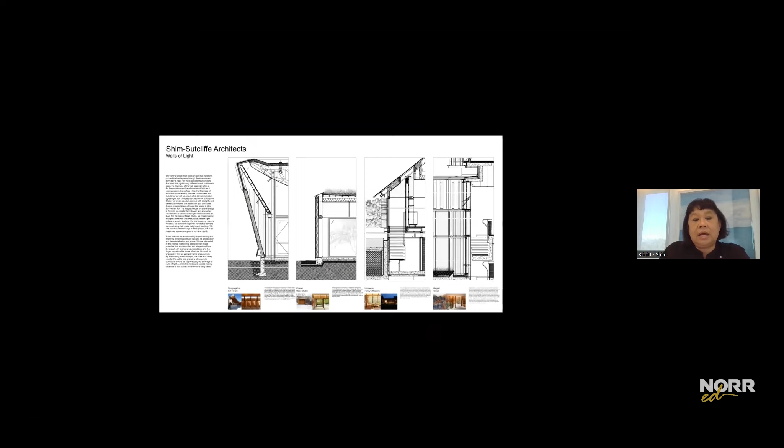This was the installation in the Biennale, but we actually thought about walls of light and the way that we create these thick walls that amplify and monitor and alter the reading of light. So we drew these very large sections as part of this exhibition.

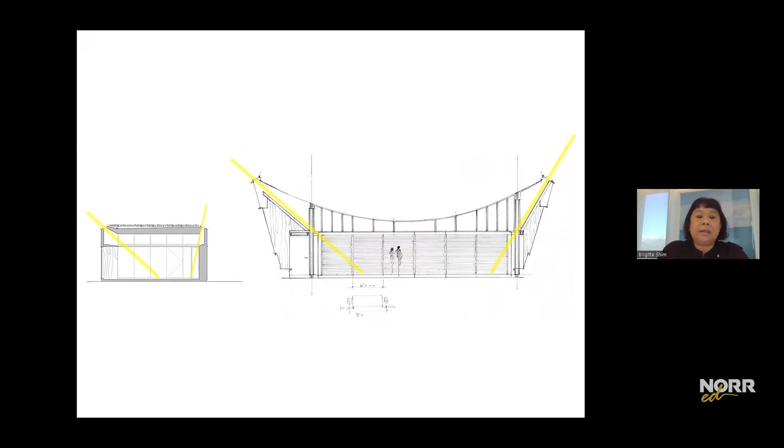Here were two very different projects of different scales, a small studio, and on the right-hand side, a synagogue in Portland, Maine. The studio is a very simple building, very modest scale, but we're using a kind of clerestory light on an angle that brings light into the space.

Here you can see there's an 8-foot datum, a series of wooden coffers in birch plywood, and the way that the skylight enters and passes across the wood creates a kind of glowing condition. We use different spacing related to different walls.

One of the things that we think about a lot as Canadians is winter. We are at 43 degrees latitude. So even our early projects, we often would ask our photographers to go into snowstorms to take photographs because we felt it was so important to capture the dimension of winter.

We also often would position the kitchen sink within the row of apple orchards, very much thinking about both the role of winter as a season, but also the role of everyday life. This idea that winter is really part of who we are as Canadians is something we need to be very aware of and conscious of as architects.

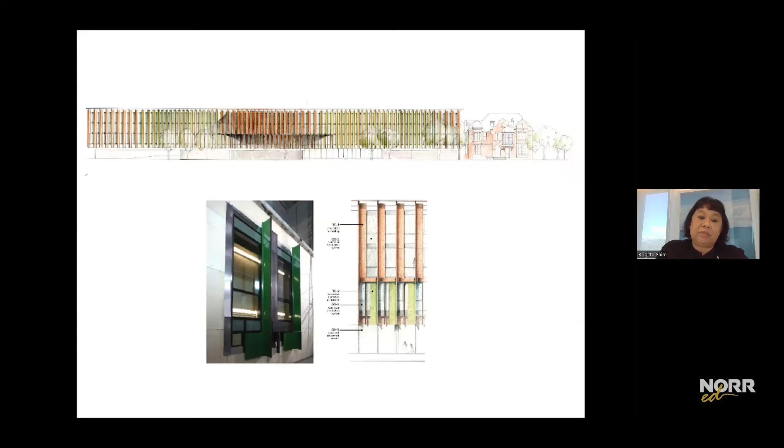This was actually a full-size mock-up of 1.5 floors of the project, with as many conditions as we could figure out. It was built by our fabricator, Rauschmann, out of Germany, and then brought to a testing facility in Bielefeld, Germany, and tested under extreme wind and rain to determine, before it went into fabrication, that this was the best kind of assembly.

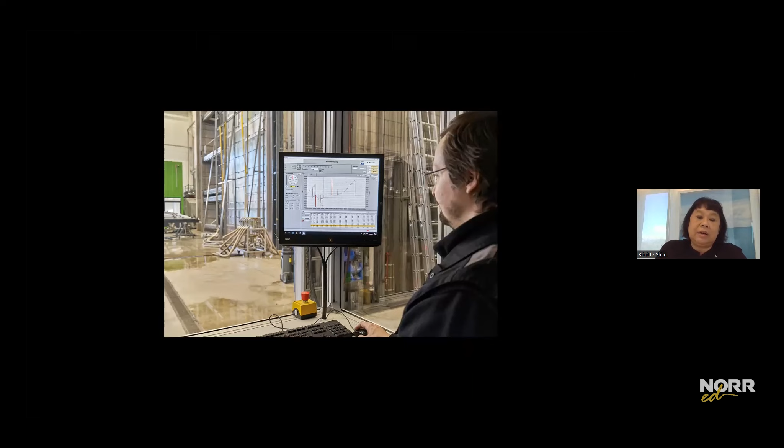They fine-tuned and made all kinds of very minor adjustments. And then when you go there, it's now part of the facade of the building. So this kind of testing and retesting, and working really directly with our fabricators, is a really fundamental part of the design process for us.

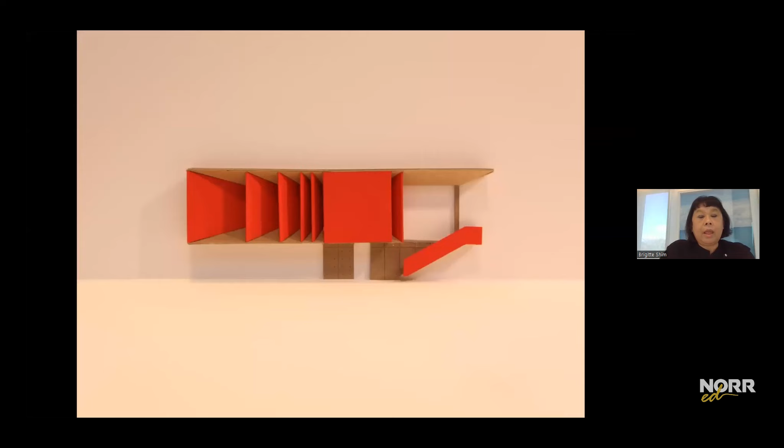So the first project I'm going to share with you is a bit of a wacky project. It's called the Wong Dai Sin Temple. It sits on Steeles Avenue in Toronto, technically in Markham, between Bayview and Leslie. This was a very early study model that we did, and when they saw this model, they said 'whipped horse,' and we didn't quite know what they meant.

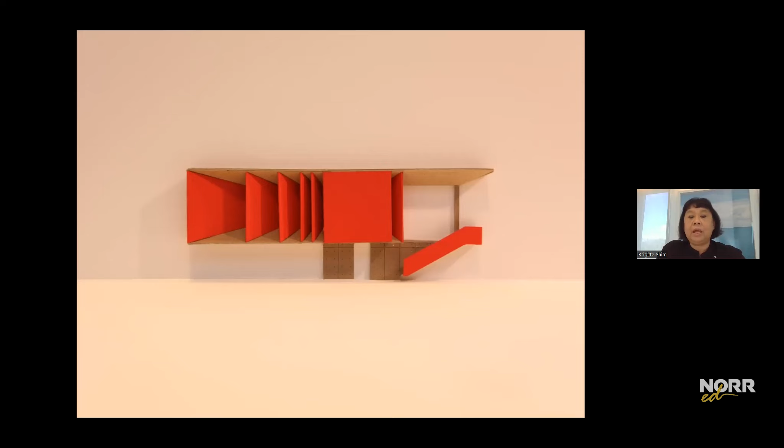But they were part of Taoism, one of the oldest religions, and they valued the fact that in their Tai Chi moves, there was both asymmetry and equilibrium at the same time. When they saw this model, it really spoke to them about that very challenging balance. These are some very early study models of the interior of the space that we did.

This is actually the project where we have two cantilevers. There's a series of structural columns in the middle, all connected by a raft foundation, and a 10.2 meter cantilever on one side and a 5.2 meter cantilever on the right-hand side. One is the counterbalance for the other.

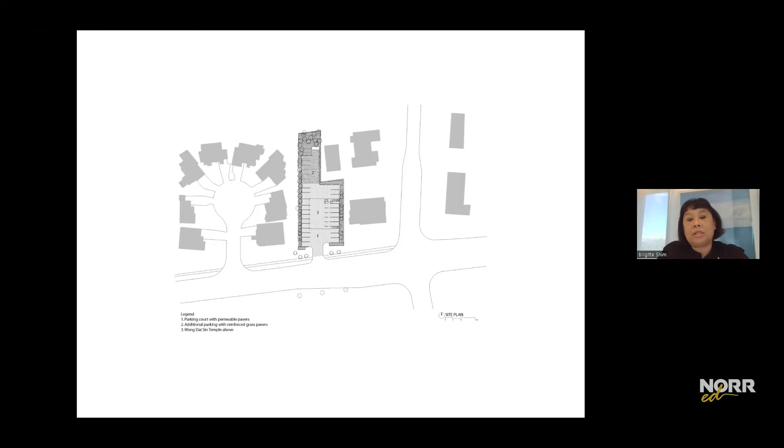It's all done in pre-stressed concrete, and we're working with deep fins of weathering steel to provide large window openings further back for great cross ventilation. You can see the site is super suburban—next to it is a cul-de-sac with really big houses, and you can see our project wedged in between.

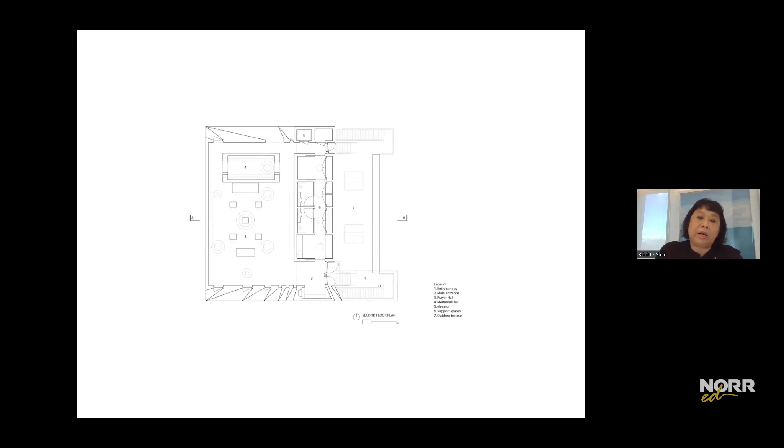We actually have a very simple space. You can see a back of house on the right-hand side, the main prayer space, and number 4 is actually a memorial hall where you light incense and honor your ancestors.

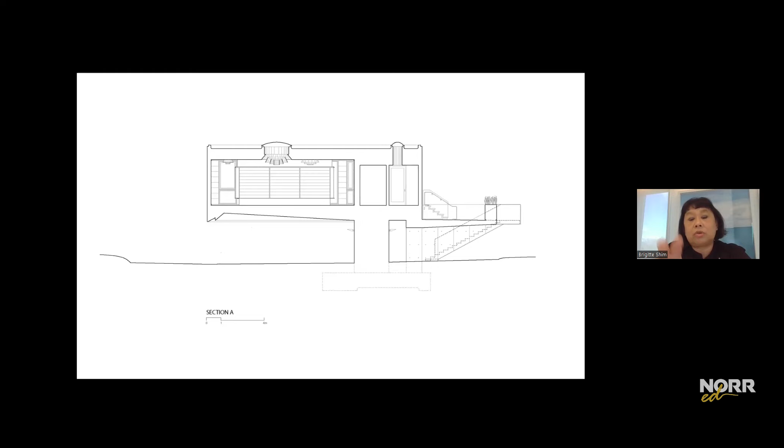Here is a section which is really the key drawing for this project. You can see the structural bays in the middle, on the left-hand side the larger cantilever, and on the right-hand side the counterbalance for that cantilever.

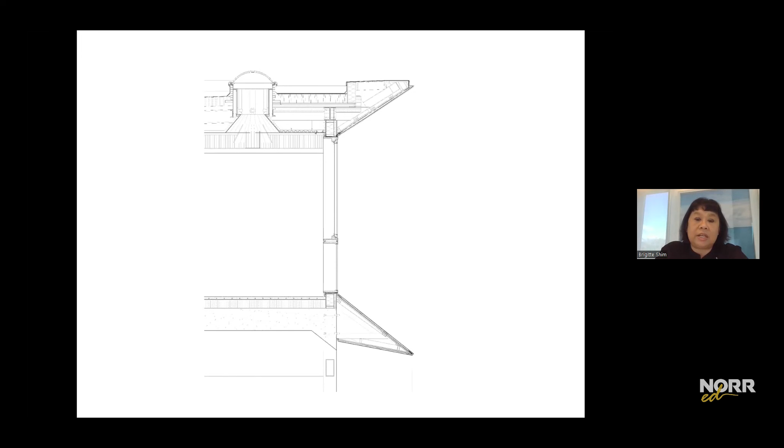We've included a whole series of light monitors into the ceiling, along with these kind of fins that are part of the project. Here's a view at night where you can see the structural fins marching down the middle, the one cantilever, and the way that you can almost see right into the space.

This is a view of the north elevation, and you can see a slightly different shaping of the Corten steel. There's a single elevator that goes up to the main floor, stairs on either side, and parking below the cantilever. This is a view of the west elevation, and again a view of the structural concrete bays.

We also added skylights into the terrace to bring light into the lower level. Often what they do is Tai Chi underneath the big cantilever. There's a canopy on Steeles Avenue providing an indication of the front entrance, and this is the outdoor terrace.

As you enter, you can see the statue of Wong Dai Sin, and these light monitors that are also there to hold incense—they'll actually use long spirals of incense. All of the skylights are motorized so that they can have good cross ventilation in the space.

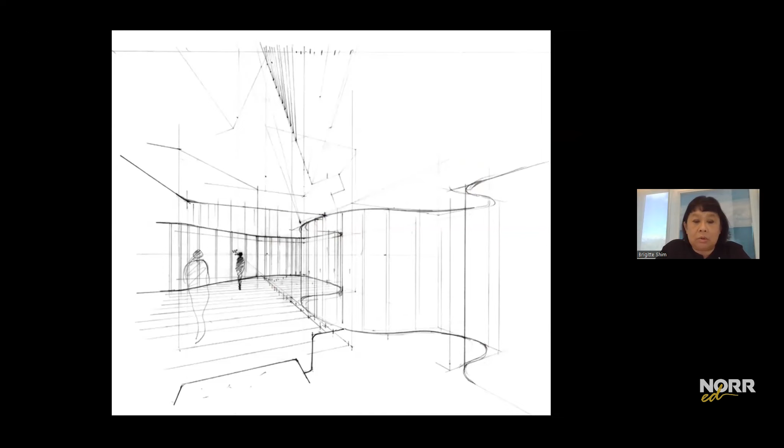We had to really scratch our heads a bit to figure out how we could absorb curves into our own sensibility. So this is a very early sketch, and this is a very early study model.

In addition to the curves, he wanted a performance space for 200 people in his living room, which is a bit unusual. We actually developed a whole series of wooden fins that shape the light and frame different views of a Toronto ravine.

So this is a drawing that we did of all 97 fins that are angled in different directions and different thicknesses to really create this kind of light modulator for the building facade.

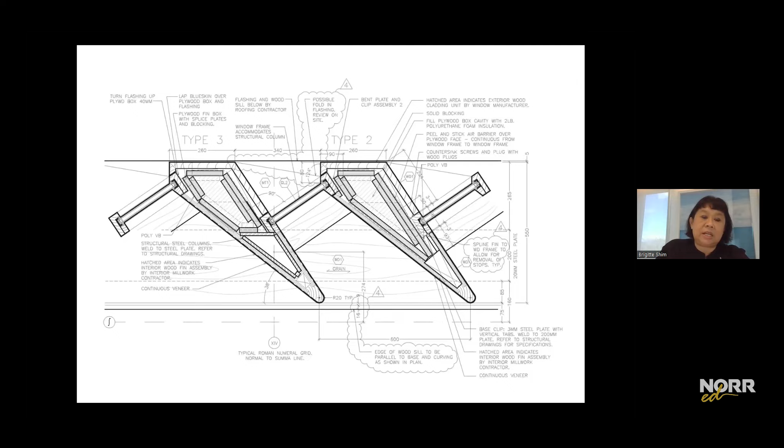Then technical drawings giving you a sense of the way that we embedded, in effect, the glazing into these fins so that you didn't read a window frame, you just read the relationship between light and wood entering the project. And again, they were all fabricated.

You can see them all numbered. These are the exterior fins, and then we have the interior fins. And here's an early mock-up. We had different potential fabricators produce a fin as a mock-up for us to determine who we would go with in terms of the actual work.

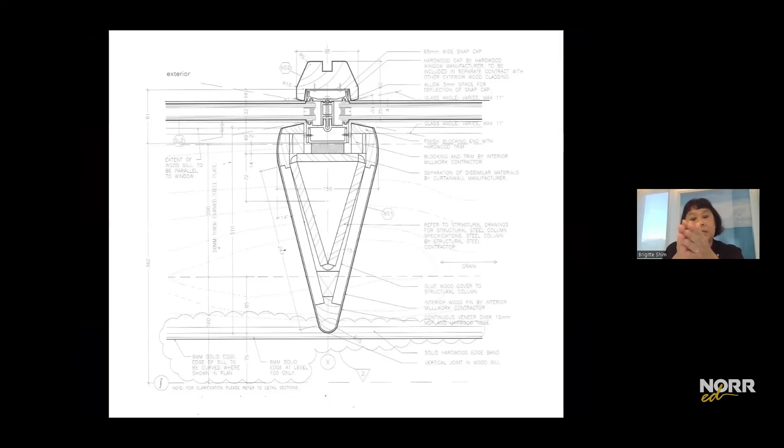And then we have a standardized fin, which is actually at the lower level. So there's a screen made up of an upper level of these shaped angled fins, and then a more standardized fin. The standardized fin has a snap cap on the exterior, with double glazed units entering it.

Then a shaped wood piece, and every third or fourth one is asymmetrically loaded and structurally connected to the larger structural frame. Here's a full-size mock-up in materials of that same detail.

A view of the standardized fins here in one portion of the project. And then some studies, so here you can see the relationship between the upper fins and the lower fins.

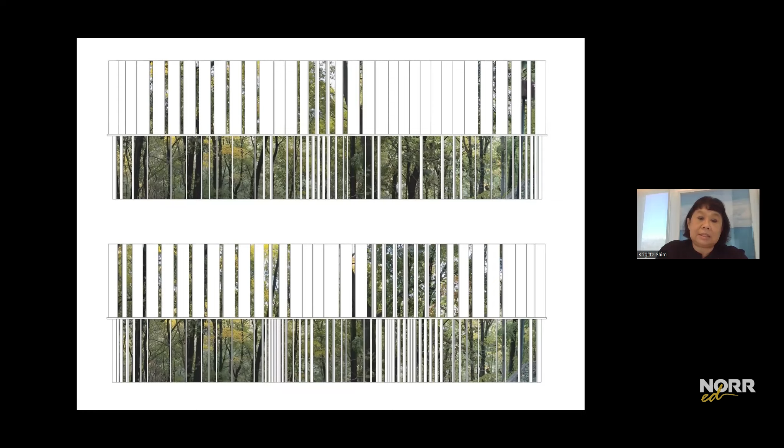We're looking at it in different locations in the project with the ravine landscape in the distance. And then finally, this is the final result, where you're seeing our client Jim on the upper left.

We actually took photos of every season. So this is actually springtime. This is summer. This is fall.

And this is winter. So we really saw this kind of elevation of the building as almost like a golden curtain over the ravine. And for us, this nature-culture relationship was really fundamental.

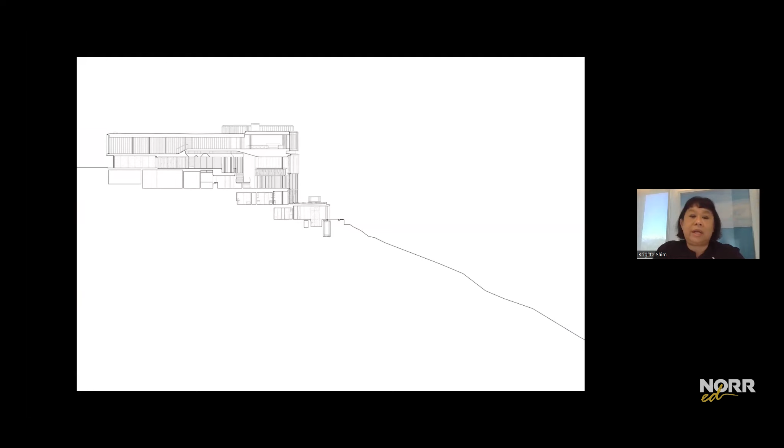You can see the section, which actually goes way down the hillside to the Don Valley. So it reads like a 2-story house from one side and a 5-story house from the other. This is a cross section where you can see the entry level and then the performance space, which is at the lower level of the double height space.

Bedrooms above, study and gallery below.

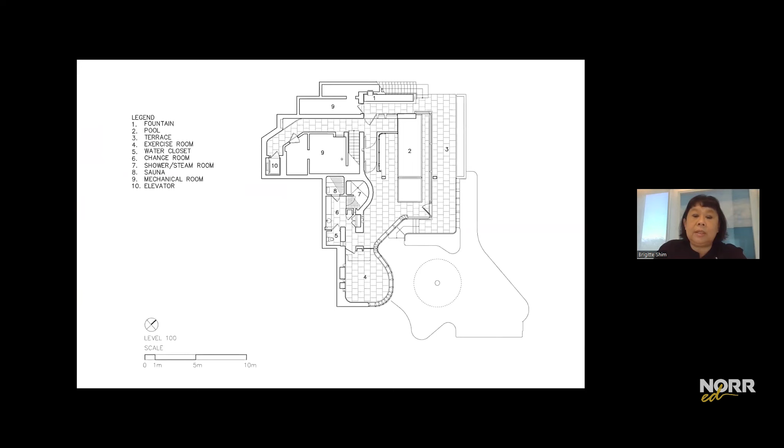And then in plan, you're actually looking at the lowest level here with a reflecting swimming pool and back of house. This is actually a level with gallery and study areas.

And then this is the main performance level here. And the entry level here, where right at 1 is where you enter into the project.

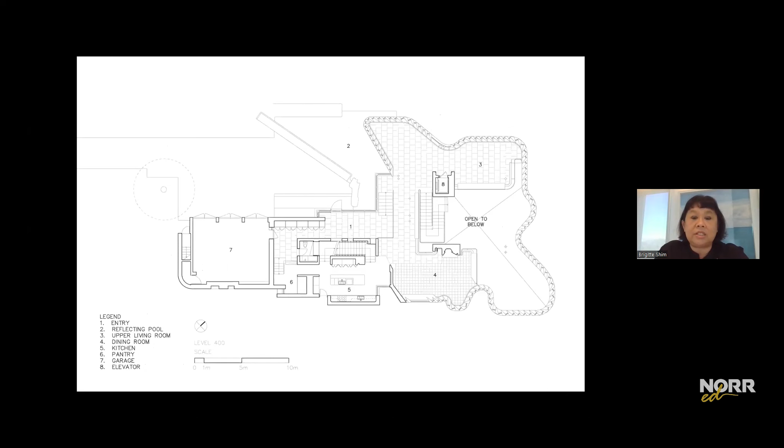And then always the backdrop of the ravine, which becomes part of your experience. And really you feel as if you've entered a Toronto ravine without necessarily going outside.

And then again, the sense of the scale of the house shifting when it needs to accommodate performances, and this kind of dual role of it both being domestic, but also having a public function at the same time.

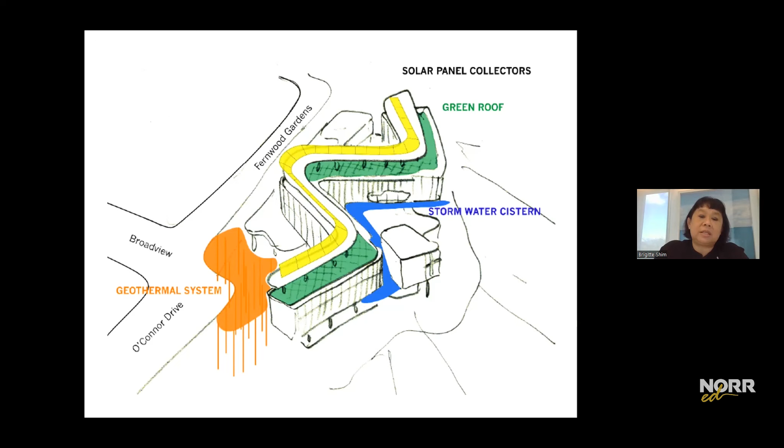They wanted the greenest building that they could afford, so through the whole process we kept pricing everything all the time to really make sure it was fiscally responsible and as green as we could actually design. This kind of healthcare or long-term care facility is not known for being green, so we were really happy to work with them to make that a reality.

This is an axonometric, but it gives you a pretty good sense of the overall project. On the far right-hand side, you're looking at the Taylor House, an 1850s residence in East York. It was owned by the Taylor family, who owned the brickworks, Taylor Creek, and it's a very fine house.

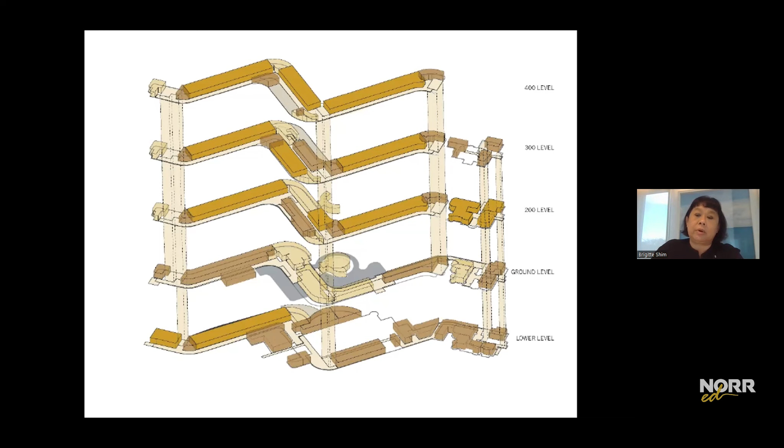You're looking at the reflecting pool and the chapel in the middle of this axo. And then you're looking at a double loaded corridor in the middle and two single loaded corridors going off to either side. And here's an aerial view of the project.

The project itself is situated right on the ravine edge, and we had to work closely with the Toronto and Region Conservation Authority and all of their requirements.

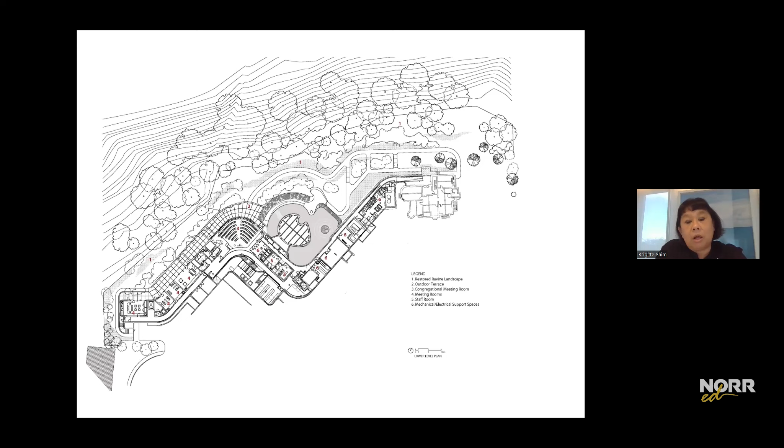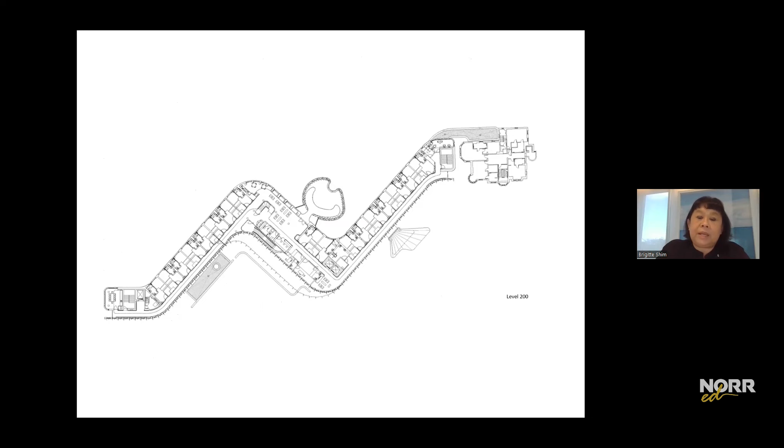At the lower level, there are large congregational meeting rooms, smaller meeting rooms, and a lot of the back of house. As we move up, you can see in this plan double loaded units, a double loaded corridor in the middle that has rehab and nursing stations and many of the shared facilities, and then sister suites in each of the single loaded corridors. In the very far right, you can see the Taylor House.

Previously, it had been the Ina Grafton Gage Nursing Home, and there were all kinds of buildings butted up against both sides of the Taylor House, so you couldn't even read it as a house. We had those other wings, built in the 1920s, 1940s, and 1980s, removed. We wanted the house to have a certain dignity, to read as a kind of standalone residence.

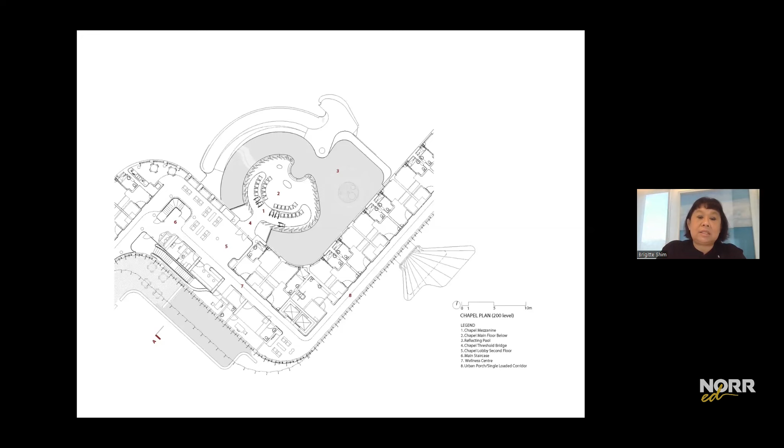The sisters talked to us about how important the chapel was. They felt it was like the heart and soul of the whole project. We needed to make sure that infirm sisters could enter on the second floor of the chapel, and more able sisters could arrive at the ground floor.

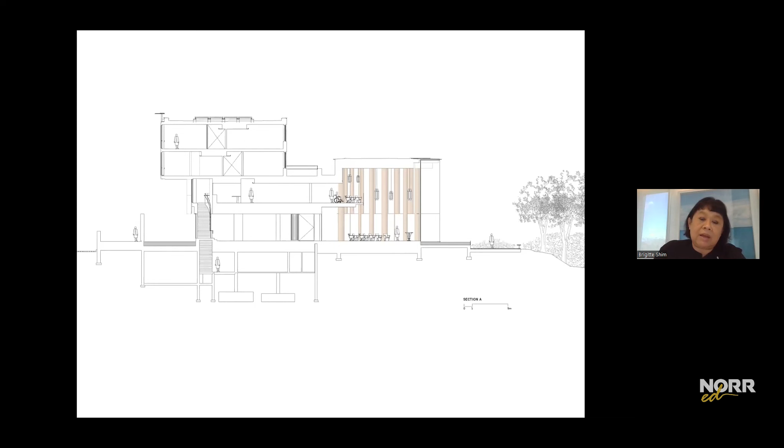This is the entry threshold, and water is a key element, so the chapel is sitting in a reflecting pool. This is the upper level of the chapel where you can enter from some of the sisters' suites directly.

We brought the Stations of the Cross from their old monastery to the new monastery, so it was really a way of taking a piece of their old home to their new home.

The next project I'm showing you is actually a 20-year project. We're not that slow, but there are a series of projects that took a long time period with gaps in between. It sits on the Canadian Shield, this amazing granite rock which is part of the reading of our landscape, the boreal forest, which is also key, and our amazing freshwater lakes everywhere.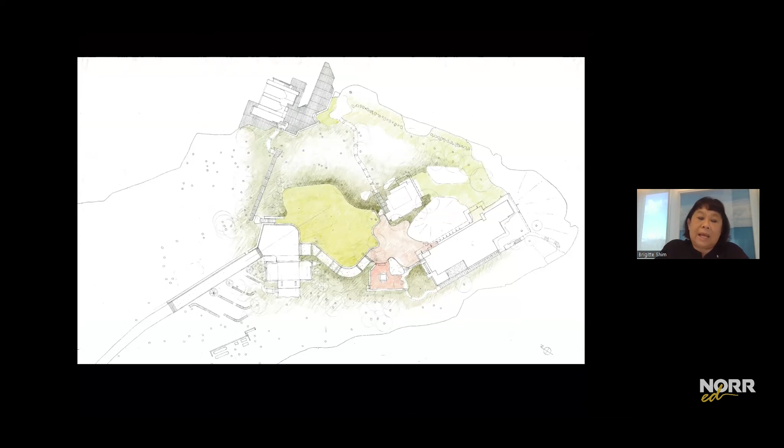The boathouse we did quite a while ago, and it is a combination of heavy timbers and more refined Douglas fir wood, and it sits on Lake Muskoka. We're really working with heavy timbers to create a level of plasticity. I think of this whole project as a laboratory for living, a series of amazing experiments we were able to develop with our client, who's an architect.

Here we're looking at covered outdoor boat slips that are cantilevered, balconies up above, working with a combination of steel and wood together, a kind of hybrid condition. At the entry, you're looking at the exposed underside of the structural framing in wood, and a view of the lake beyond.

Inside the main spaces, we're using a 1x2 Douglas fir to create shaped ceilings, with views of the lake, and then connecting to the vernacular by using painted oak flooring, which is very traditional for most boathouses in the area.

Really, bathroom areas that we wanted to feel like outdoor porches. And then the ability to work with custom hardware - this is all bronze rod inspired by snowshoes. Custom boat cleats use a stainless steel shackle with a cast bronze element set into the wood decking itself. And then a view in winter of that really small project.

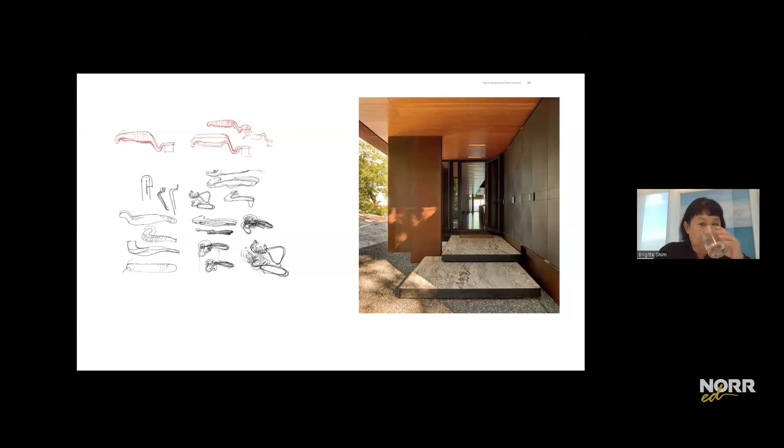Experiments with hardware, a kind of entrance that feels like a porch, using very deep fins to really create framed views. And then this shaping of the underside of the ceiling, echoing some of the work in the boathouse done many years earlier. Views of the lake itself, working with shaped glass on the right-hand side, which is a kind of J section that's a double glazed sealed unit.

And then thinking about this deep winter light that comes into the project. This photo was taken, I think, in December, so you can see the way that light shapes and penetrates the project.

Continuing on, hallways that also become libraries, and always trying to double up program wherever possible. And then this ongoing obsession and interest in hardware. So you're looking at in the middle wood that we've shaped. The upper one is actually 3D printed in plastic, and the bottom is cast in bronze.

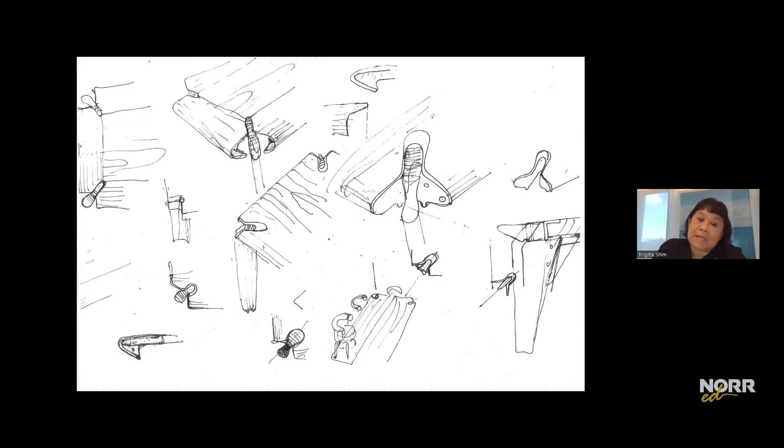So that's the process. And then things like custom tables. These are some sketches, and this is the bronze legs of a custom table. And then lighting that we also designed and printed out as 3D prints.

And then views of the final part of the project. This is a kind of view from above, looking at the main building. This is an aerial view looking at the green roofs and the various extensions. And then a view looking at the point where we're really trying to integrate the built form with the landscape.

The very last project I want to share is actually a project we just finished, the Ace Hotel in Toronto. We worked with a group called Atelier Ace, which was their in-house design team, and ourselves. We were the design architects, the architects of record, and the architects of the public space, collaborating with Atelier Ace directly.

The project is located in downtown Toronto, and we love the red brick garment district. We love the existing warehouse buildings, and we sort of lament the fact that many of these buildings have been demolished and many of them have been replaced by shiny condominiums.

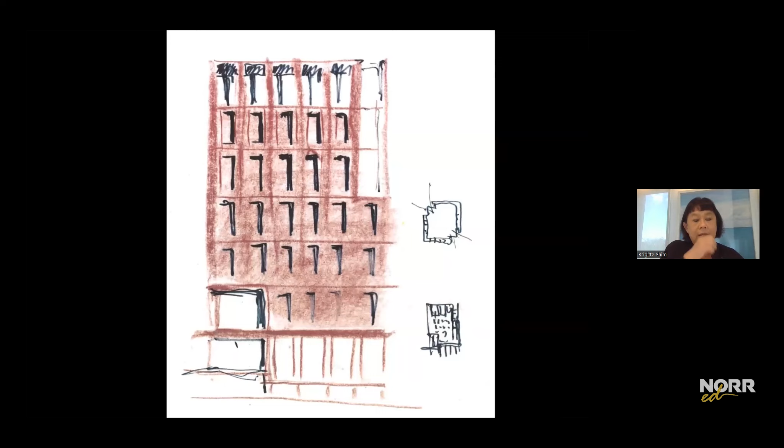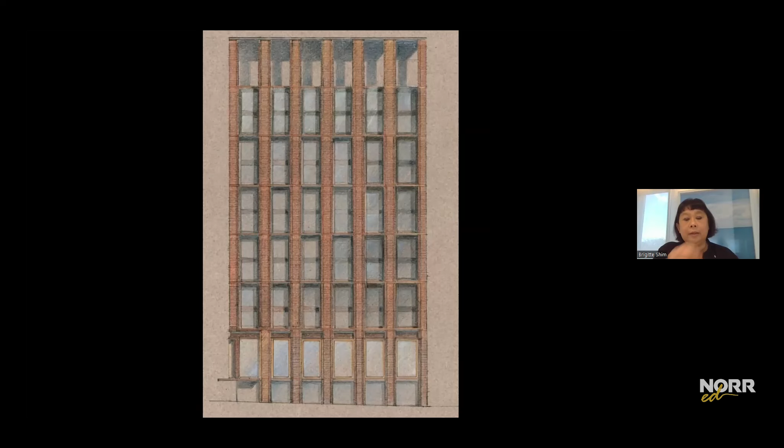This is a drawing looking at the materiality of the brick facade. A study model looking at it overlooking St. Andrew's Playground. It's located at the corner of Camden and Brant. And then a study looking at it in the street context of Brant. This is the facade overlooking the park.

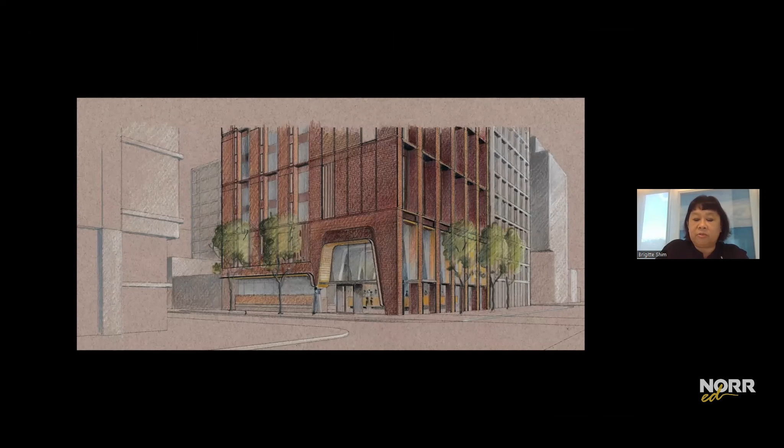A study of the lobby where you can see these shaped, poured in place structural frames. And then looking at the corner, so this on the right-hand side is Brant and on the left-hand side is Camden, where the structural frames come out to become the canopy proscenium of the project.

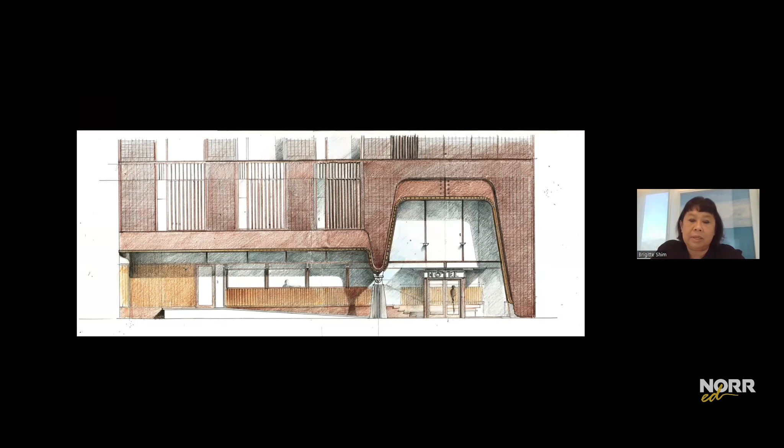A further study of the elevation with the screens and different elements bringing you up to the right level. There's a ramp and a revolving door and a kind of lobby inside. And just giving you a sense of the exploratory drawings, trying to understand the relationship between the lower level and the street, and this floating lobby in the middle. Then some study models that give you a sense of the park on the right-hand side.

And then this is the final project. This is a view giving you a sense of it looking over, looking onto the park. Brant, Camden is the street on the left, and Brant is the street in your foreground. This is a view from Camden looking at the side of the building. And this is a view of it from the park looking back to the building itself.

What we really loved was the kind of depth we were able to create. We're not building a warehouse building, we're trying to convey the materiality of those buildings that we love. So you can see the depth of each of the structural frames. A view at night where you're actually seeing the last frame and last knuckle coming right outside.

And then the kind of detailing of the brick. Unlike the traditional warehouse buildings, this is all precast brick, done in a factory in a controlled environment. We're actually really articulating the fact that it's not laid up by hand. We're using a Norman pattern, using the brick very deliberately to explain what it's actually doing.

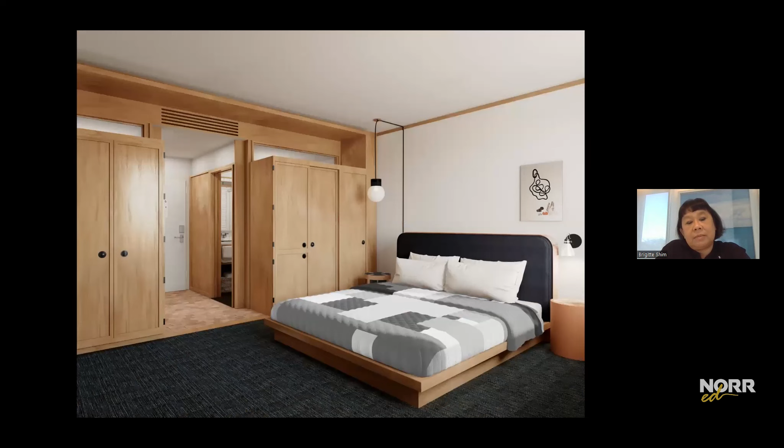Brigitte, thank you for that incredible presentation. I think that in my opening comments, the jury comments are quite true. You and Howard have created a lasting impact on Canadian architecture.